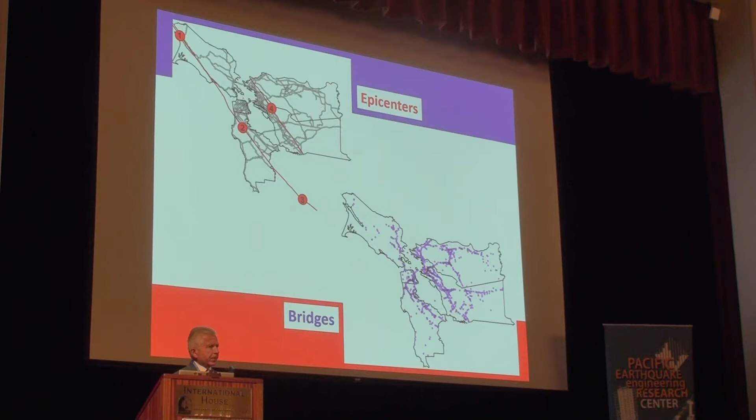Now, let's say that these bridges all meet the current seismic code, seismic standards. They are designed to withstand earthquake without collapsing. They're not designed to be functional after the earthquake. If you take a subset of these bridges, let's say 20% of them after a strong earthquake, you can imagine the kind of impact that's going to have on the whole area, and it's going to be far-reaching. It could even have effect for the whole country, could affect international commerce and all sorts of things.

Again, the issue is that our bridges are designed not to collapse under strong earthquake. That has been our primary criterion in our bridge design. So the way we judge failure and success is whether we are preventing collapse or not. Based on that criterion, this is obviously failure.

This is the superstructure of a bridge. This is the column—it used to be a column. But this one is success. We are ready to open a bottle of champagne, start smoking cigars, and say, hey, we did it. This is the right engineering. Obviously, the public would not buy that.

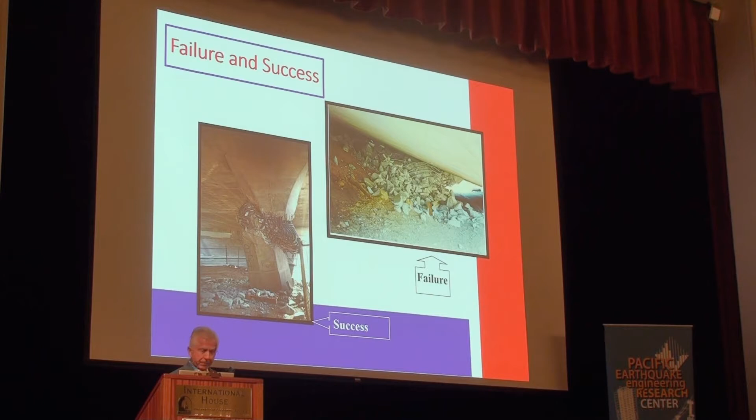Also, what happens to the community and the region after the earthquake becomes very questionable and not defensible. So our thinking is that preventing collapse is fine, we should do that, but in addition we should also think about what happens after the earthquake. In other words, no-collapse design is not sufficient. Serviceability after the earthquake has to come into the picture.

So when it comes to bridges, there are two things we have to take care of. One is the damage in plastic hinges of columns, and the other is controlling the permanent drift. These are the two main things that make bridges dysfunctional after the earthquake, even though they have survived it.

Now, we could think about performance-based design and broaden its meaning—not just performance during the earthquake, but also performance of the system after the earthquake. We could do that. There are other tools that have been around for a while. Base isolation is a tool that can prevent damage. But there are also other areas.

Those are advanced materials, and I'm going to talk about some of these. They involve using things that we are not used to: shape memory alloys, ductile concrete, post-tensioning of our bridge columns. It's pretty unusual, and other means.

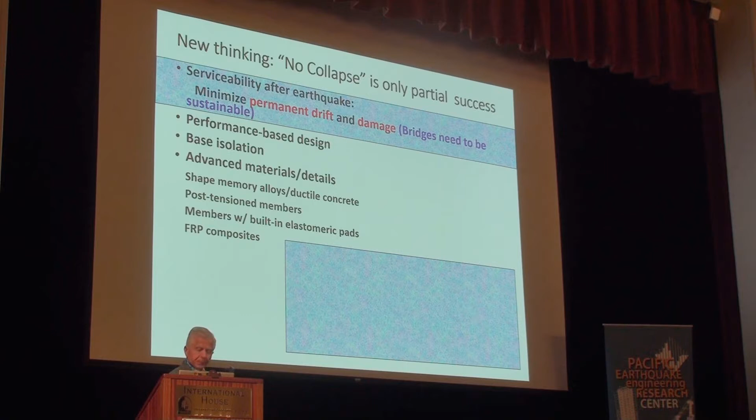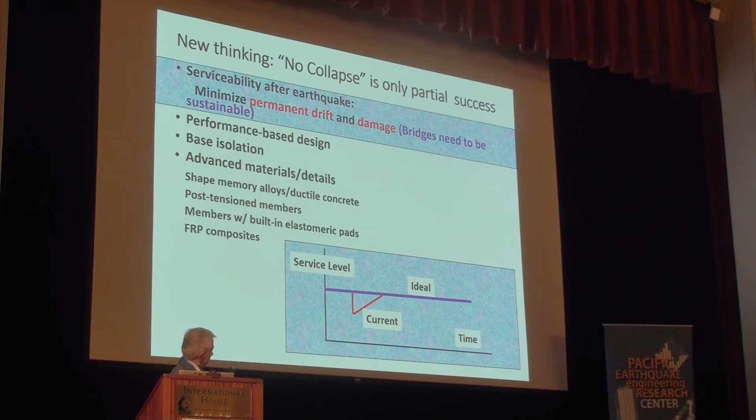And of course, the ultimate goal is to go back to the very simplified plot that I suspect you're going to see a few times during this conference—this is where we are now. Our ideal situation is that the bridges do not know that there was an earthquake. That would be the ideal situation.

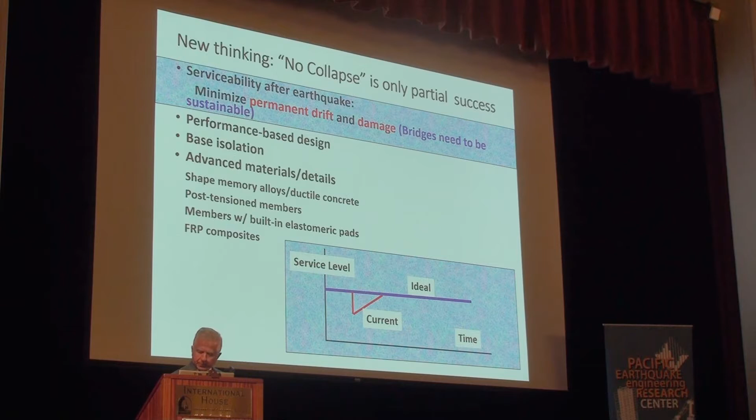So let's talk a little bit about these issues. I'm talking about new construction, not substandard bridges. These are new bridges that meet current code. That's what I'm talking about.

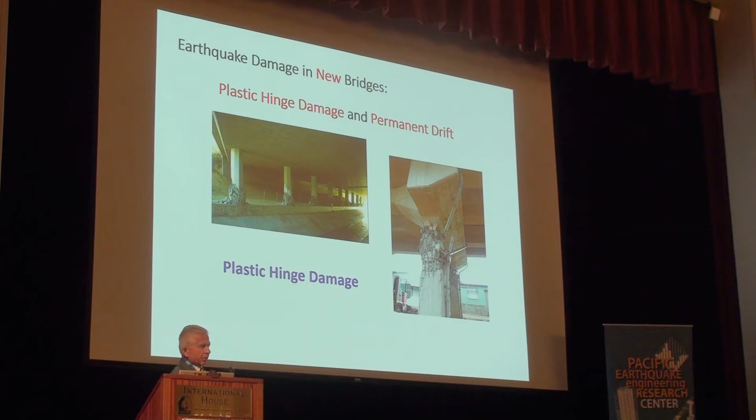So we have plastic hinge damage. Again, both of these bridges are considered successful designs because they did not collapse. But we have obviously major damage where these bridges cannot be used. It can also be permanent drift.

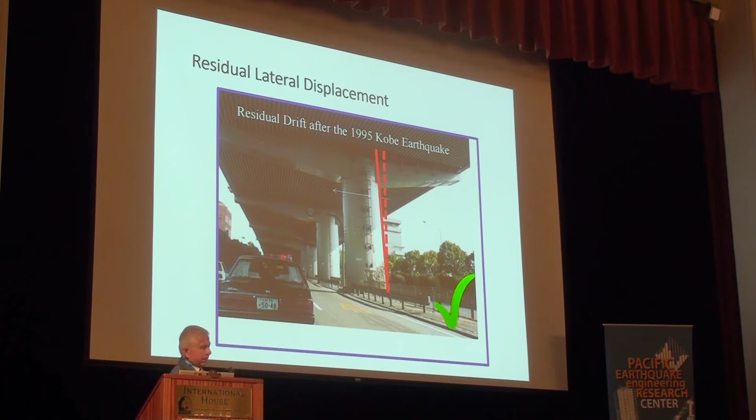About 100 bridges after the Kobe earthquake were torn down because of permanent drift—it wasn't because of major damage to plastic hinges. The bridges did not feel safe.

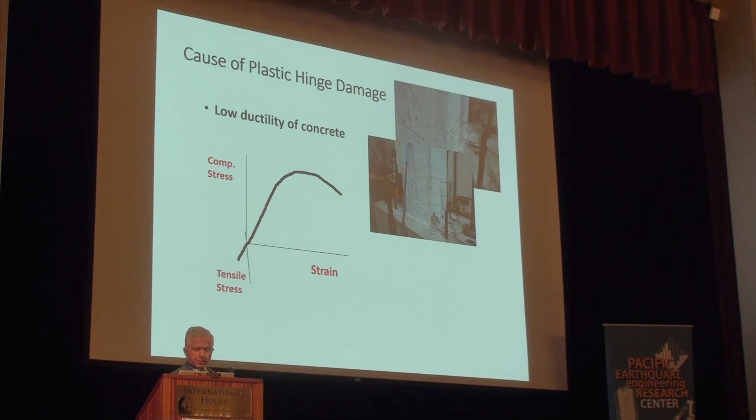So let's get to the cause of this. Why is it that we have plastic hinge damage? If you look at the stress-strain diagram of concrete, in this case unconfined concrete, as we start cycling our load on a bridge member—in this case a bridge column—we begin to have some spalling. That spalling begins to extend into the core, and eventually we have the type of damage typically expected from reinforced concrete structures.

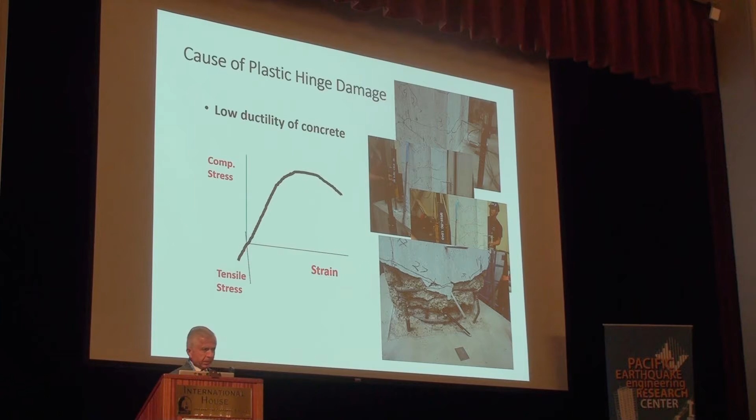Even though the column may be stable, it still undergoes this kind of damage. So that's what was causing the problem. We're using concrete, the unconfined concrete as well as confined concrete, which eventually gets damaged as well.

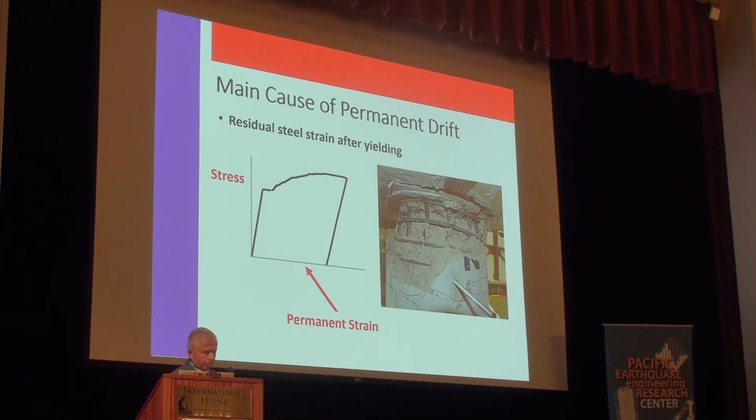Now, if you look at permanent drift, the primary culprit is the steel reinforcement we use. The stress strain diagram for steel shows that we are designing our columns to yield under strong earthquakes, but that yielding means there is permanent strain.

In addition, there's damage in concrete that leads to permanent deformation that we experience. So we need to address these two issues, the permanent drift and the plastic hinge damage, in order to make things work. To reduce plastic hinge damage, there are a number of things that researchers have been looking at, things such as the engineered cementitious composite.

It's basically a grout that has fibers, so it's a fancy name, but it is what it is. There's the ultra-high performance concrete that has also been studied. And built-in elastomeric rubber pads - these are not base isolation systems, but the kind of material used in base isolation. They're part of a column and intended to work in flexure.

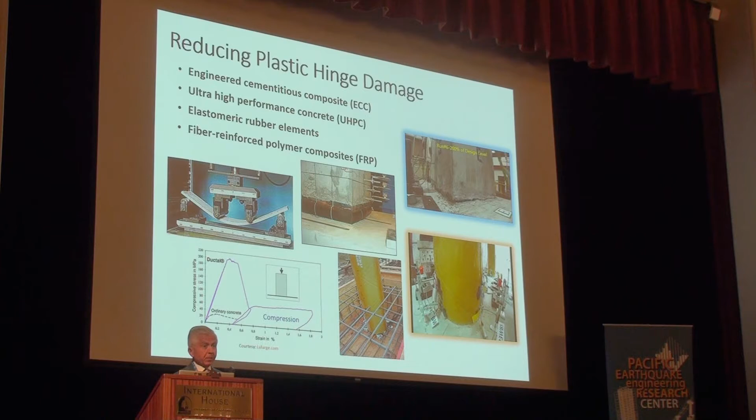Or you could have fiber reinforced polymer, which can also reduce the plastic hinge damage, or eliminate it under even strong earthquakes. To reduce permanent drift, post-tensioning of columns with steel tendons, or CFRP if you want to make it more durable.

There are other alternatives - super elastic shape memory alloys that could be made from nickel and titanium. Yeah, there are things that we are not used to. We structural engineers or bridge engineers are not used to this kind of thing. Or using copper-aluminum-manganese - there's a new generation coming, iron-based shape memory alloys.

Fiber reinforced polymer also tends to reduce permanent deformation. So post-tensioning alone would provide this recentering. These are CFRP tendons that can be used for post-tensioning.

For super elastic shape memory alloy, the basic stress strain diagram is a flag-shaped response, meaning that when the stress goes back to zero, the strain also goes back to zero, unlike steel, where the stress strain curve would follow a path that gives us the permanent drift.

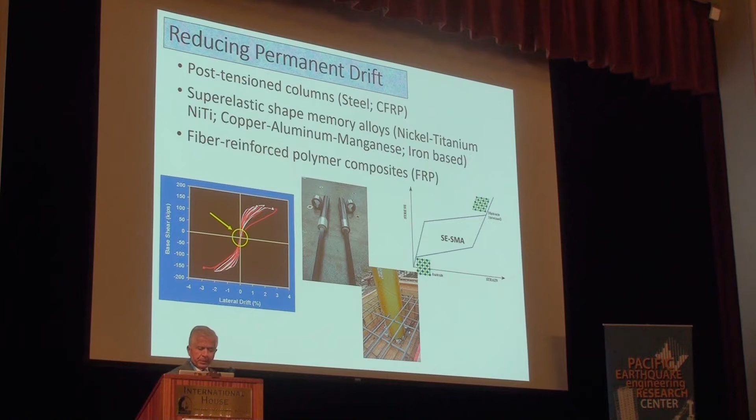So these have been some of the ideas explored and studied. To give you some examples, here is a column where we use a CFRP tendon, tested on a shake table. The cluster around the origin tells you that the column kept coming back. At the end, when there was a rupture or fracture of longitudinal bars, we had, of course, a different story. But this allows us to eliminate or substantially reduce permanent drift.

The shape memory alloy combination with ECC is an example of that. You notice that flag-shaped response I mentioned is maintained in a column. This is the column that was tested, and you notice the shape is flag-shaped. Also here, the fact that they come back to the origin tells us we don't have that much residual displacement, pretty much negligible.

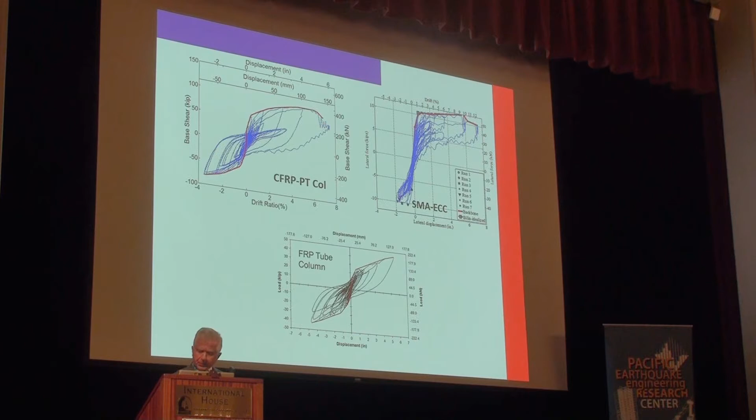And when we use FRP tube, we do not completely eliminate it, but there's a substantial reduction in permanent drift as well. So when we combine some of these materials, what are we going to get? Here's an example of two identical columns.

One uses conventional reinforced concrete, and the other uses shape memory alloys and ECC, under the same drift level. This is the kind of damage you see here. In the bridge with this column, it would have to be shut down to traffic, whereas here we do not need to do that.

Post-tensioning alone, we have tried that with conventional concrete. We see that even though we eliminate or substantially reduce permanent drift, there is still some damage in the plastic hinge, so we are not completely eliminating that.

When we substitute the regular concrete with UHPC, this is the kind of thing we get under the strongest, maximum credible earthquake that this column was designed for.

In terms of quantifying that, if I share with you the residual drift ratio versus the maximum drift we applied, for the conventional column this is the kind of permanent drift we had, whereas by going to SMA, we are reducing that by about 85%.

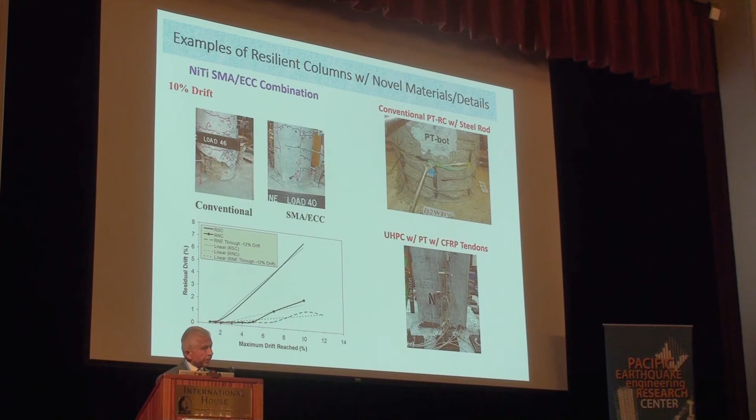So there's definitely evidence that yeah, these things could work and could make our structure functional. So okay, well, that's wonderful in a laboratory environment, but what is that going to do for our engineers? What can they do? Are we just dreaming that this thing might happen sometime, or do we have any codes? Do we have any guidelines? Do we have any tools to give our designers? And the answer is yes.

There was a project that we completed just a little over 2 years ago. It is funded by the National Cooperative Highway Research Program. We did this project in collaboration with Modjeski and Masters, an outfit that writes most of AASHTO structural design codes. So we worked with them to make sure that we have something practical, something palatable. We also worked with Berger ABAM of Seattle to come up with design examples. So it's not just a dream—there are preliminary tools available with design examples that open the door for using these advanced materials.

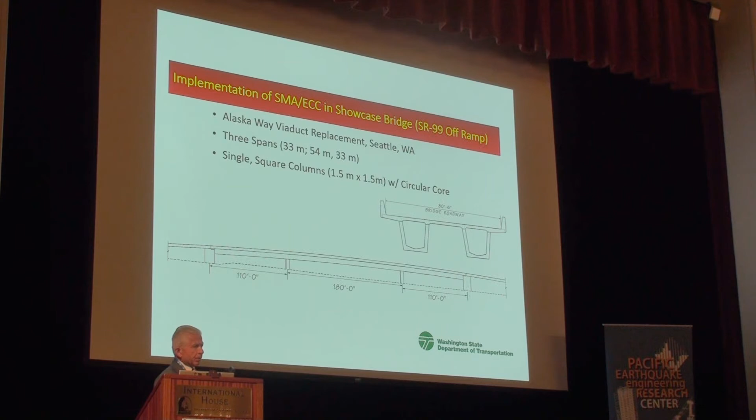I'm pleased to let you know that we implemented one of these innovative concepts using shape memory alloy and ECC in a bridge in Seattle, Washington, with funding from the Federal Highway Administration and the Washington Department of Transportation. This was a 3-span bridge supported on single columns. This is the superstructure. Our focus was, of course, on the columns, using the shape memory alloy and ECC combination in that bridge.

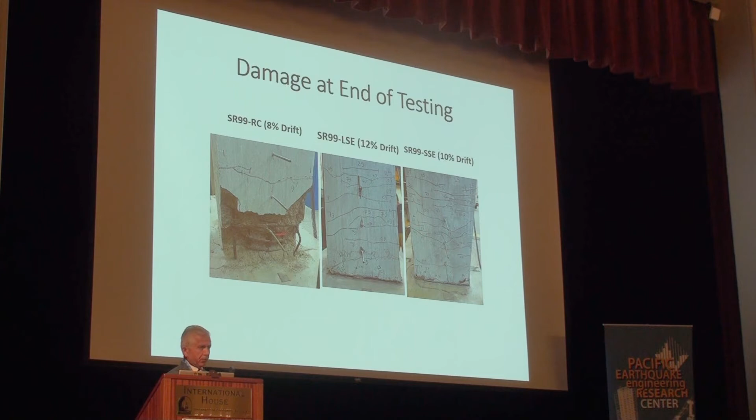There was additional research we had to do to optimize the way we connect these shape memory alloy bars and the length of the bars. These are some of the columns that we tested. We started with our reference column, and these are 2 other columns that use shape memory alloys and ECC with different lengths, because optimizing the length was one of the objectives of the study. And of course, they did work. This was implemented in the bridge.

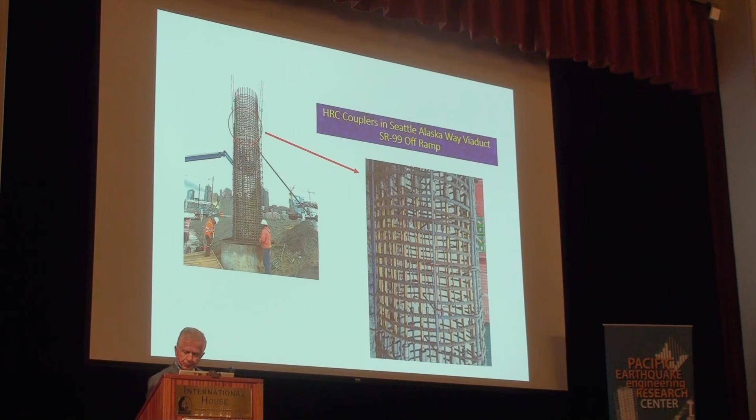Here you see a close-up of these shape memory alloy bars, like number 10, equivalent to number 10 shape memory alloy nickel titanium bars, connected to steel bars above and below, because we don't need to use them over the entire length. The bridge was constructed and completed, and became open to traffic last February, 2019.

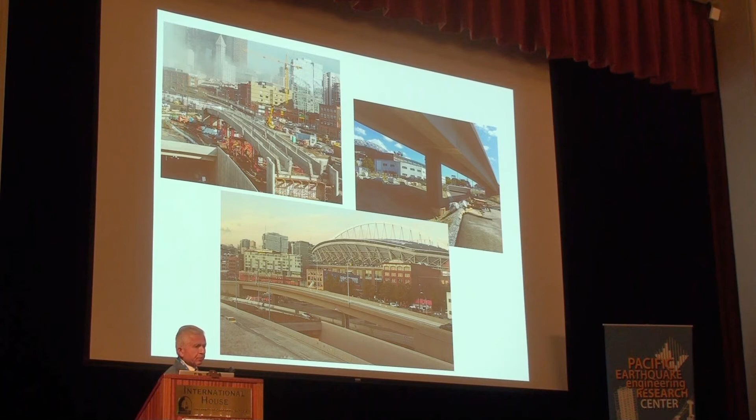The NCHRP project that I mentioned was funded by AASHTO essentially through NCHRP, and the topic was selected by practicing engineers. So it's very encouraging to us researchers.

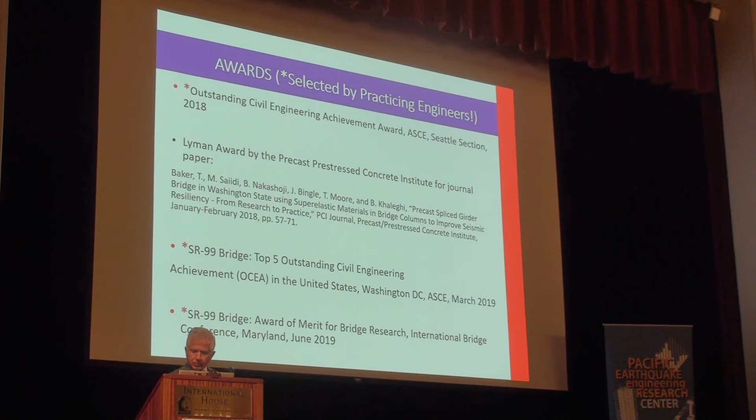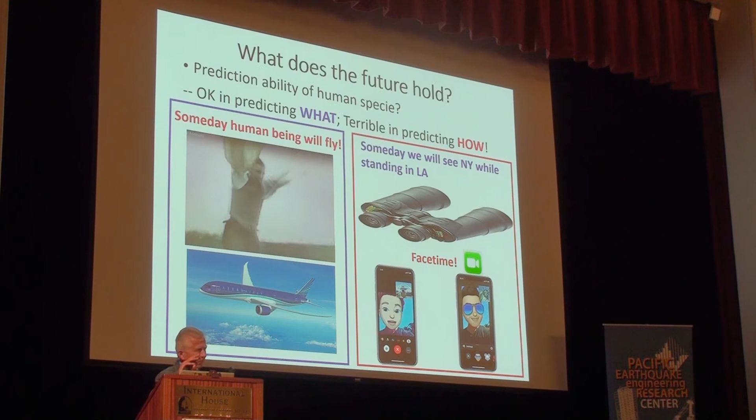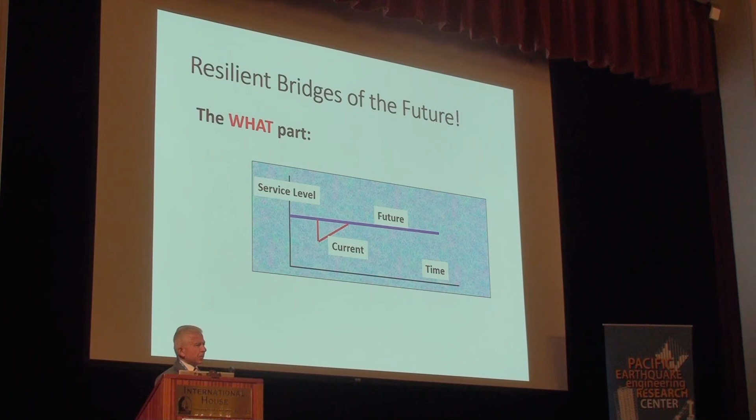So my point is that, yeah, we can talk about all the paths to the future. We know what it is that we want to do, but when we get there, maybe it's going to take a few iterations. So the ultimate goal, of course, is this. The 'what' part is very clear—we want to have functional structures.

So now we can even take this further. Now this one you can say is a dream. Can we look at the emergent technologies and use them? Well, there are certainly indications that yes, we could do that. We have done some trial applications here and there to show that yes, it is feasible, it is possible, but we should be willing to adopt other technologies to use that.

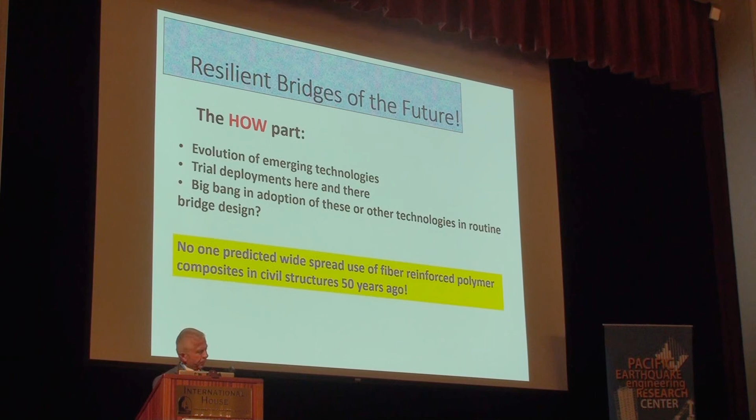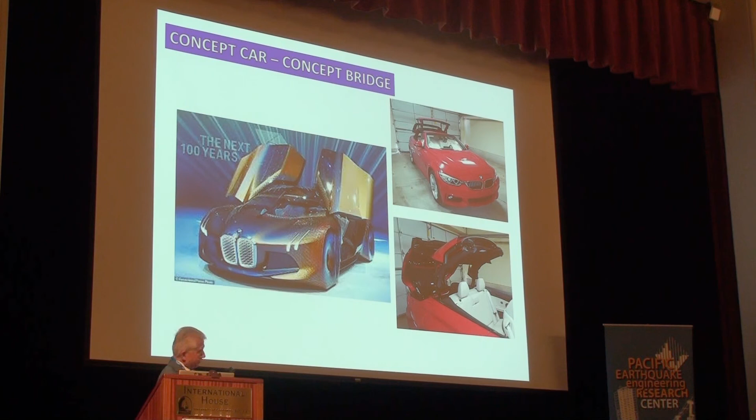But again, parallel to this, if you go back 50 years ago, when we began to use fiber reinforced polymers in structural engineering, no one predicted that we could have such a widespread use nowadays. It was something that came mostly from the aerospace industry, extremely expensive, very specialized, but we adapted. We found ways of using it, bring the cost down. It is okay for us to have concept bridges, just the way the automotive industry has concept cars. They were thinking that someday we may have cars like this, but now I have one in my garage, so this can work.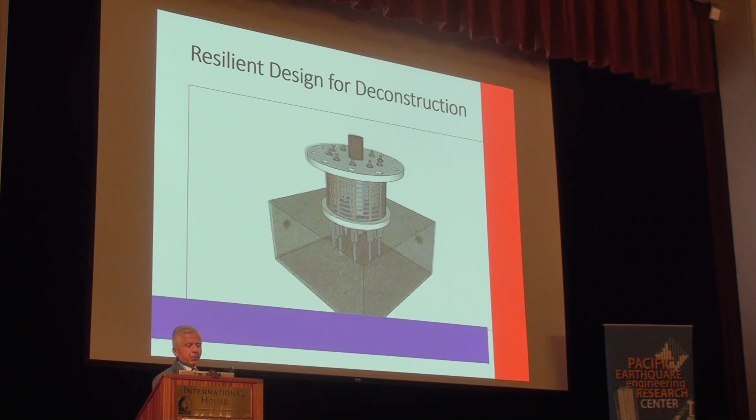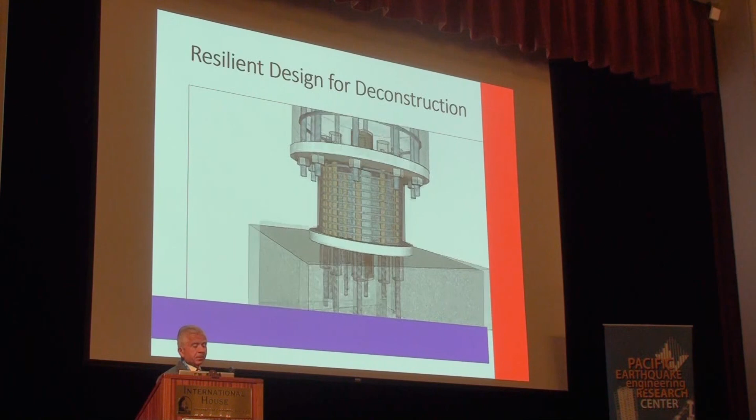And again, looking at the future, why not try to make our bridges deconstructible? About 10% of the bridges, about half of the bridges that are demolished in the U.S. every year, is not because they have a structural deficiency. They're demolished because they have functional deficiency. There's nothing wrong with the bridge itself. Why don't we start making bridges that can be undone and taken somewhere else and can be reused?

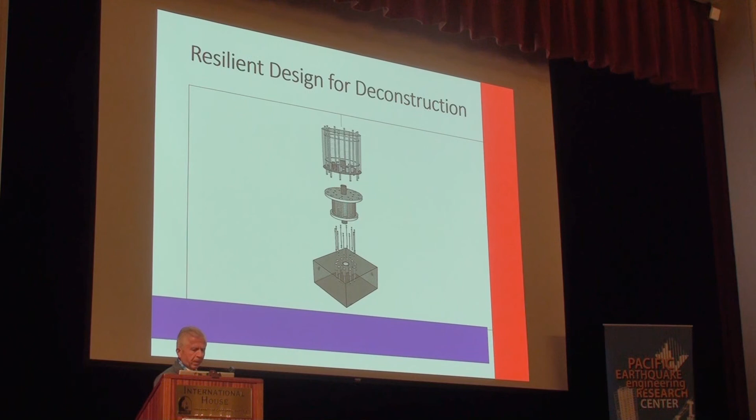You know, you talk about environmental impact and not using more concrete and cement and all of that. Why not do that? And meanwhile, while you're making the deconstructible bridges, why not bring in these new materials and make them so that things can be detached and reused somewhere else, or if there is minor repair needed, it can be done.

So what it is that we have learned from recent research is that it is feasible to get into novel materials to use them. And there are barriers, no question about it. I had to deal with that. But they're not insurmountable. We can deal with them. We can handle them. We like challenge, don't we?

So we do need to convince engineers that life cycle cost has to be considered, because the initial cost of a bridge may go up by 3-4%. Okay, but you have a bridge that will remain functional after a strong earthquake. So there's a trade-off. And this other one, we're talking about design guidelines, and they really need to evolve a lot faster than reinforced concrete.

We have been studying reinforced concrete columns, connections, for the past 70 years. Okay, and we are still doing it. We are still testing bridge columns because there is additional information that we are still seeking. We're trying to fine-tune our work and learn more.

Well, maybe when it comes to novel material, we don't have to wait 70 years to do that. Maybe we can start using them and learn as we go, just the same way that we did with reinforced concrete. It's perfectly all right to be evolutionary in this business.

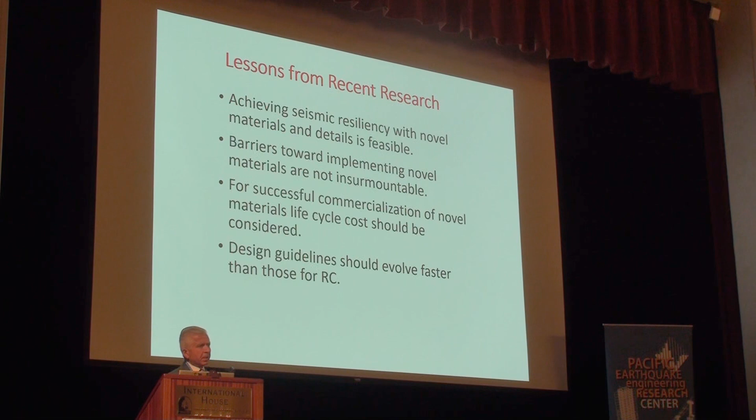And so how are we going to get there? My thoughts are that we should start talking to materials engineers. Structural engineers need to talk to materials engineers and be patient with them and ask them to be patient with us, because the way we communicate is very different, okay? But we need to do that. We need to take the time and do that.

We need a lot more research and to generate information. And I'm not saying put everything on hold until research is done. I'm saying that we need a much stronger database. Look at the database that we have for steel and concrete versus the database that we're dealing with in shape memory alloy. There's no comparison. So we need more of that.

That means we need to learn a lot more about materials and components and structural components, structural systems. And our modeling, right now we have been basically doing patchwork, okay? We are taking what's out there for reinforced concrete, and we are taking those and trying to squeeze them into something that's applicable to shape memory alloys and ECC. Well, maybe we should take another look at that and come up with things that really are directly applicable to the novel materials.

So with that, I'd like to leave you with these thoughts and hope something will trigger your interest in looking at other kinds of material and other approaches. Thank you very much.